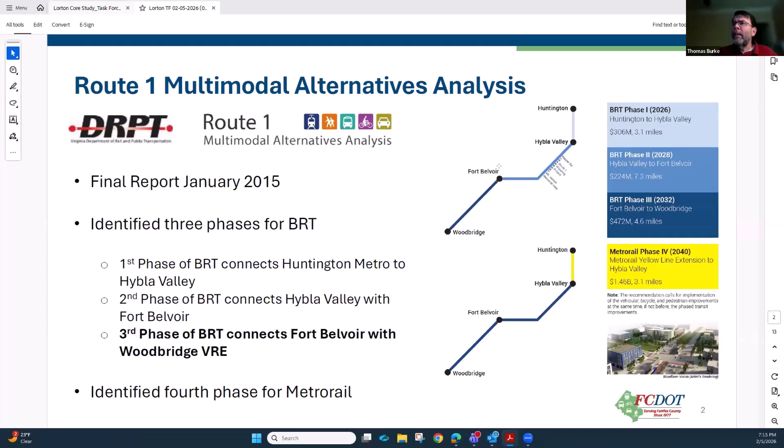Phases 1 and 2 were part of the Embark Richmond Highway Comprehensive Plan Amendment that was adopted in 2018. And then our capital project section at DOT has been designing and putting the funding in place for the one. Some of you might be aware, but the one will be the BRT that runs in the median of Richmond Highway from Huntington to Fort Belvoir to the Pence Gate.

And it's going to have stops at the Penn Daw CBC, the Beacon Groveton CBC. Hybla Valley Gum Springs is going to have 3 stops because it's kind of a stretched out CBC. South County's got one, or Gerry Hyland Government Center, and Woodlawn has one. And then it'll stop ultimately at the Pence Gate where the hospital is.

Phase 3, we didn't really include in Embark Richmond Highway. We had discussions with South County Federation, and we decided we needed to have a much more detailed Lorton planning effort to get before we put the BRT on the map for phase 3. And that's what Lorton Visioning, or the Lorton Core Study, has become.

Up until now, all discussions have talked about how the BRT would be in the Richmond Highway corridor, mostly an exclusive median running right of way. Prince William County, 11 years ago, was insisting that they're not going to rebuild the bridge over the Occoquan. So you got to get that BRT back in mixed traffic before you get to the Occoquan, because it's going to go across the river in mixed traffic.

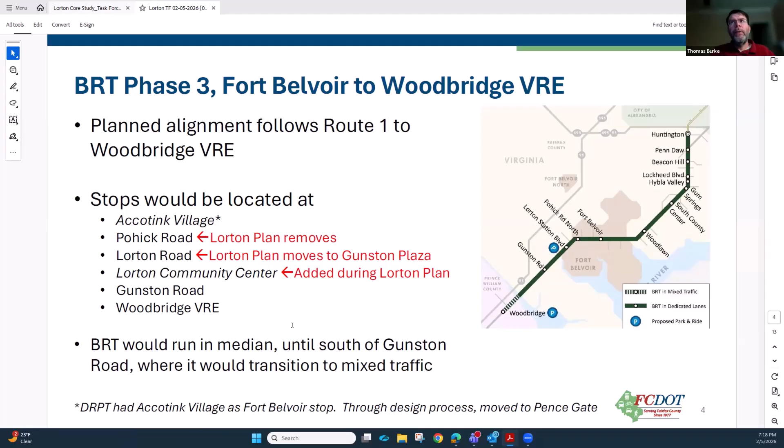So that's kind of what phase 3 of the BRT has been thus far. So a question has been raised: what if we were to connect the BRT to the VRE? How would you do that? And does it make sense? Do we want to do that, or are there other options?

You would still have most of the connectivity to even to Gunston Plaza. You would probably have to kind of reconfigure your BRT stop at Gunston Plaza, but you'd be connecting to more population and jobs this way because you're connecting to the VRE station, and that's what we're replanning. We're replanning Gunston Plaza, so we're hitting at least two of the sub areas.

So the only con that we're really thinking of is if you're taking the BRT from Prince William, this is probably going to add a few minutes to the travel time because the buses will have to veer off of Richmond Highway, make their way around. But if you're in Lorton and you're going north or south, you're probably not going to be affected that much.

It's probably more beneficial to the Lorton folks. The one thing that we thought we could do is there's 3 bus routes in Lorton right now, the 171, 305, and 371. What if we kind of reconfigured those at some point in the future to feed the BRT? That would be an alternative.

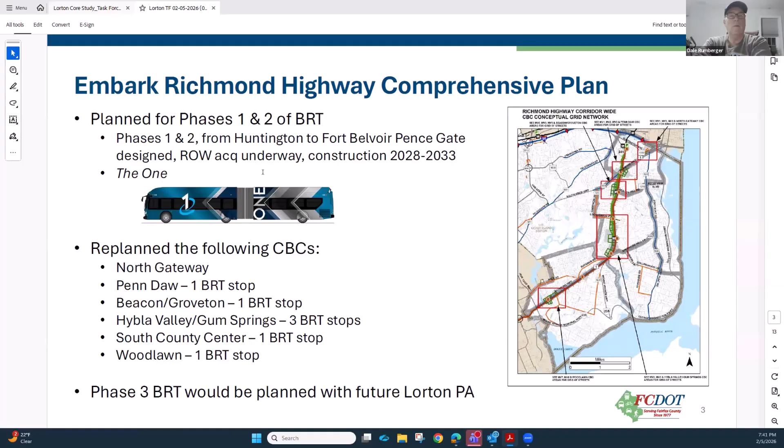To think that we're going to put large scale buses up Pohick Road, turning left and coming around Lorton Station Boulevard and back down, or vice versa, is interesting at best, because Pohick Road would need to be completely rebuilt to do that. That is an excellent point. This is an articulated bus, a lot longer than the standard 40-foot bus. Yes sir, it would definitely require some study in terms of whether this type of bus could even make the turns onto and off the road.

And we can't even get sidewalks built. So I'm trying to figure out what in the name of God we would do with a 66-foot bus. I think finally, when BRT was designed 12 to 14 years ago, I believe there was a strong belief that if you build it, people will go there to shop. I have yet to see that. I've seen the only places rebuilt in shopping have been in Prince William County, Potomac Mills area, or all the way up toward Huntington. In between, not so much.

I'm not sure the stops are there for people needing to use that as the single mode of transportation. But the other part, as already been mentioned, is relief of the commuting traffic out of Prince William County. That's really what this is - relief of the commuting traffic, trying to reduce the number of cars on Route 1, on 95, coming north. To a degree that makes sense, and that may be the pattern of the future, especially as we log jam as it is right now.

We'll get a better appraisal of that when they start putting in the pylons for the third track for VRE, going over near the Lorton Auto Train, and that pass-through traffic gets even further bottlenecked. I think that'll be an interesting indicator. But some of this, I don't know. I was more focused on what eventually we would be doing to bring people in the Lorton area back down to the 3 core areas we've designated. I believe that's going to come in the second part of the presentation in a couple of weeks when we look at that more carefully. So thank you for your time.

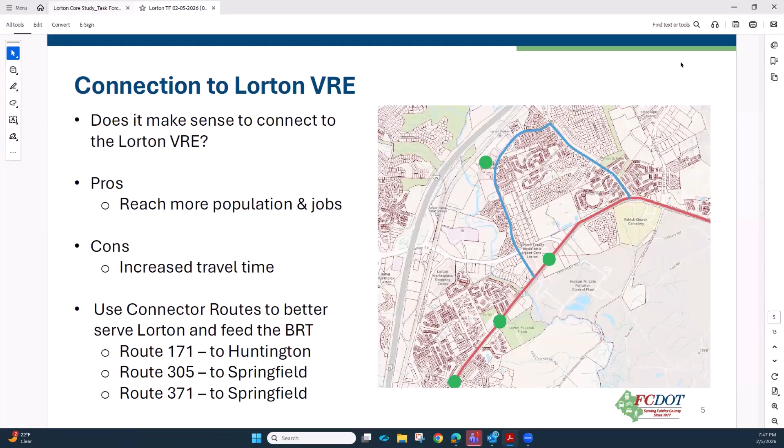I know we have other things to talk about. I wanted to jump ahead to this slide because there was another discussion. What if we wanted to connect to not only the VRE, but to Lorton Marketplace? Would we want to extend that bulb out to the BRT even more, or would we want to keep it simple, Pohick to Armistead, this little loop?

I definitely think there's value here because, as was just said, there's pretty good density of residential and commercial at the VRE station. Is there also value to serving Lorton Marketplace? And then how do we get service to the community center? So do we do northbound stays on Richmond Highway, southbound goes into Lorton, or do we do alternating routes where one goes up and down Richmond Highway, then the next one goes the other way? There's ways we could potentially serve everyone.

But what do people think? You can continue to discuss just the general one to the VRE, but I wanted to put this one on the table as well because we've been replanning Lorton Marketplace as well. Should the BRT go that far, or is that a little bit too far out of the way?

Mr. Malone: I truly think it would be helpful for the Lorton Valley portion, especially with the fact that we're trying to build up that area as well in the future. So I think that would be super helpful.

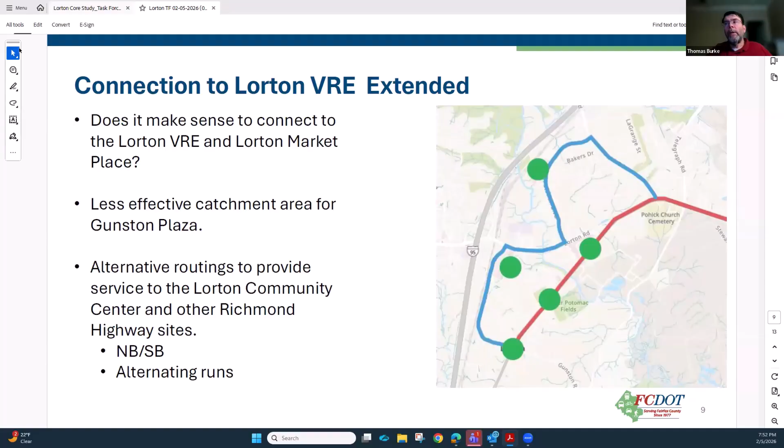This is all good feedback. Graham and Steve, we can give a sneak peek for 3 weeks from now when we come back with a more full transportation discussion. We had discussions in the past about Lorton Road being potentially road dieted to 4 lanes. Our analysis is showing that would probably be a bad idea because of the rising congestion that would come with that. We had some slides about how we might be able to make Lorton into that main street, but I don't know if Steve, Leah, and Graham have other agenda items. Maybe we can save this for the 27th.

Here's what I would say: we'll probably want to move on by the 8 o'clock hour, but since we're not asking for a vote or anything like that at this point, this is more just kind of an introduction. I don't think it's a problem to go over them real quick, and then we can return to these with the full transportation discussion.

This is a general cross section of Lorton Road as it is today, and each intersection is different. This is mid-block where you just have the through lanes, and this is an example of what an approach to an intersection might look like, where you have a left turn lane and a right turn lane. I think our consultant was using—is it Tamarind a cross street? I've got to go back, I should have checked.

As you all live it, you know there are narrow pathways. The 8 foot on the north side isn't bad, but it's really close to the road with hardly any buffer, no street trees. 5 foot bike lanes used to be considered okay. I think 6 foot on-road bicycle lanes are the new standard, but bicycle lanes on a 6 lane road designed for 45-50 mile an hour traffic is crazy.

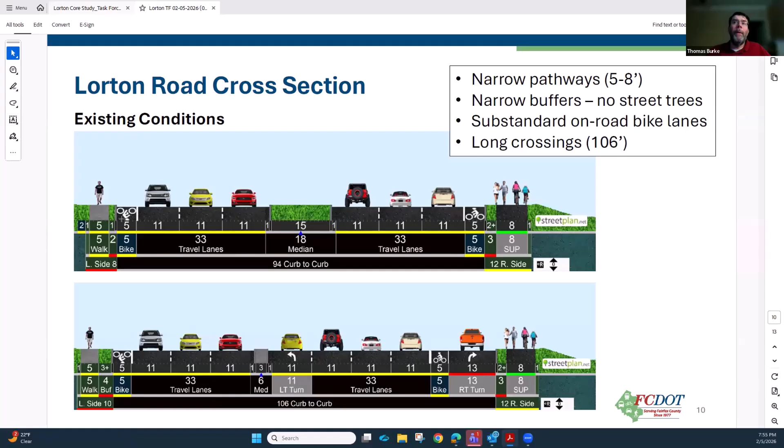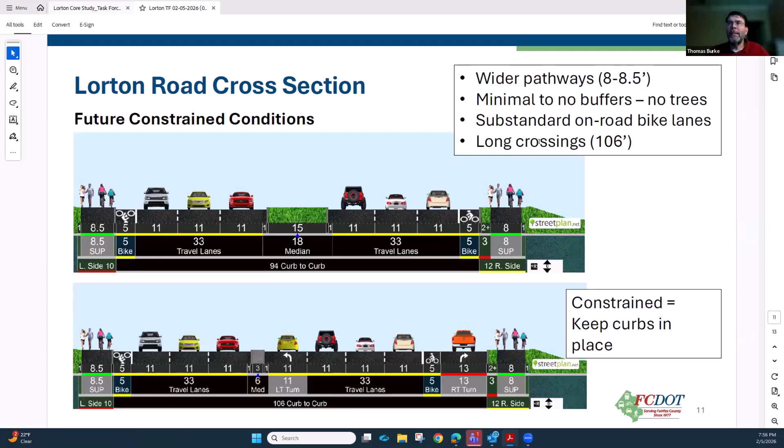That was one of my key questions, so we started looking at how we might reform Lorton Road. If we did it without moving the curbs or impacting adjacent properties much, you could widen the pathway on one side, but then you lose the buffer entirely. Some of the more timid cyclists could move up into the wider pathways, leaving the on-road bike lanes for the more professional cyclists—I'm just using that as a phrase. But you'd still have minimal to no buffers, substandard on-road bike lanes, and long crossings at intersections. So we thought, what if we were a little less constrained?

We don't want to impact the properties along Lorton Road so significantly that they're not developable—that would be a bad idea. But if we moved the curbs outward a bit, taking a few feet from properties on either side, you could have 10-foot shared use paths with 8-foot buffers suitable for street trees and lighting. That would create a much more inviting environment. Our metrics show wider buffers with street trees give pedestrians a better sense of comfort and cyclists less stress. We typically measure comfort for pedestrians and level of traffic stress for cyclists, and these shared use paths would help with that. So we could put these here.

We can answer a few questions as it's approaching 8. But we wanted to put this out there so you could think about it for a few weeks. When we come back on February 26th, we can have a deeper conversation about how we want Lorton Road, and we plan to bring cross sections for Lorton Station Boulevard as well—and maybe Richmond Highway. We've done a lot of work on Richmond Highway in past years and have a generic cross section for it too.

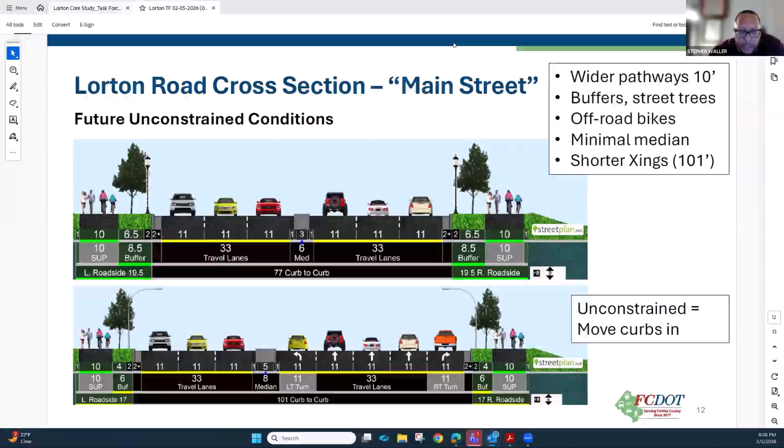I'm going to try to make this as quick as possible. I sent you all the presentation earlier today, and really what we want to talk about.

What we wanted to kind of talk about first is how in the two previous meetings, you had an opportunity to look at the land use from an area-wide standpoint, and reviewing the recommended land use framework. That was the first meeting in November. Then in December, you all had a chance to look at the neighborhood and site-specific recommendations at a very early draft stage.

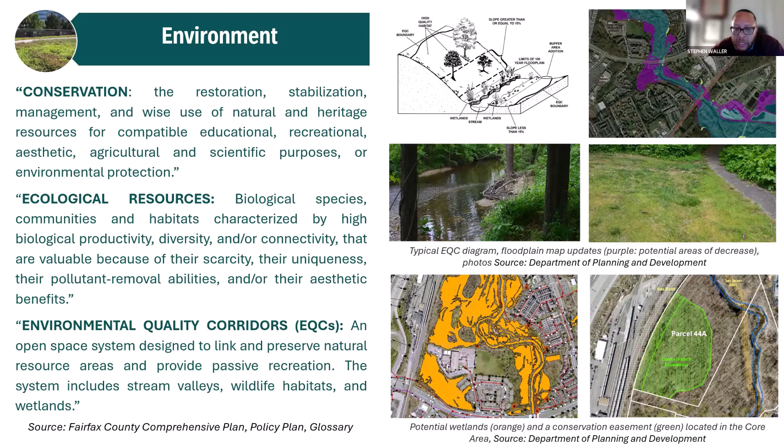Heritage resources can enhance the quality of life by providing a sense of continuity with history, strengthening social ties, and fostering community pride. In addition to prioritizing long-standing goals for preservation, culturally and historically significant landmarks that provide diversity in the area-wide landscape and built environment can also be used to inspire and influence future development in ways that are unique for Lorton.

So that was the end of that. Here's a look at the remaining schedule for task force meetings. As we discussed earlier, on February 26th we will be reconvening to complete the transportation study.

Steve, can you stop for a second? You went through all this stuff, you gave a whole bunch of stuff, you read them. What were you doing? Is that you're just telling us what it says in here, or are you asking us that we agree with everything, or that we're going to do what we've done in the past?

This was just the setup for the conversation, things to consider in the conversation. We're going to do what we've done in the past, where Graham is going to share the text that you all have had a chance to review, and we're going to take your comments on that. But I just want to make sure - I didn't know when you went through all that, if that was just background or not.

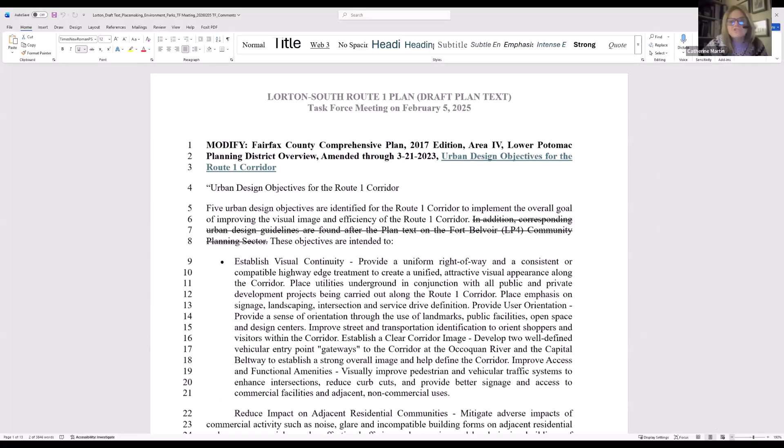Got it? Graham, you almost got it, hold on one second. Okay, are y'all seeing my screen here? It's coming, we can see it. Is that good for everyone, or should we single page it? How's that, is that better? I think you could probably zoom out a little bit more. If anybody wants to zoom in, there's 3 dots above, it says Graham Owen's screen. If you click up there, you can actually increase the font size if you want on your own personal computer.

Good to know. So I'll let Steve go through the text with you, but just for those that weren't able to join the past 2 calls, we used the same approach in the past two meetings where we were going over the land use framework and a lot of the guiding principles. And we'll go through the draft, we're calling this a process that we call the straw man. So what we do is we'll go through the text, and then if you have specific points or questions or suggested edits on any given area, we'll flag those here.

We can't usually make changes on the fly, it's just kind of hard, but we'll make comments and say we need to strengthen this language, we need to move this over here, this is unclear, whatever the case may be. We'll just note that in the sidebar, and that way when we're putting together the final draft for your review at the last meeting, we'll have everything together all in one kit and caboodle with the other sections that you've already previously reviewed.

So what you're seeing here is really just those sections related to the topics that Steve was talking about. So a lot of the pieces related to the core area and related to some of those other guiding principles around land use for the town centers and for the established residential neighborhoods, for example, as well as the innovation center and some of the areas further south in the industrial area. We've gone over that, so we didn't want to rehash any of that material here today. This is really just about those interstitial spaces, those spaces between, and really trying to make sure that those are a part of this idea of bringing Lorton together into one unified vision.

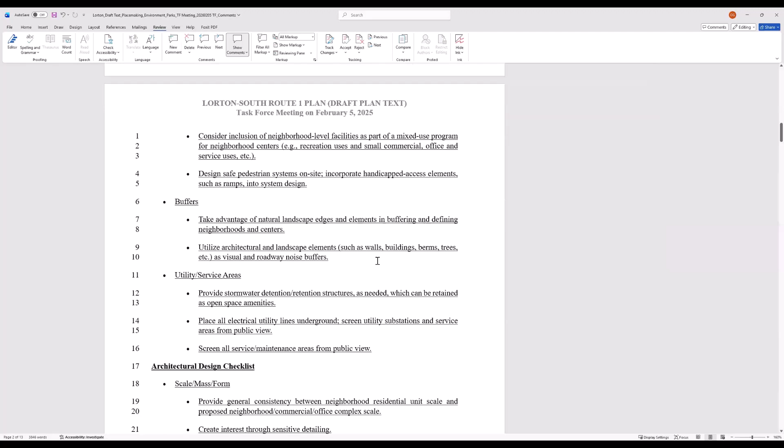Any comments on page 3? Same on 7 and 8, that would be native species.

I know one topic that's come up here before. Lorton has a specific type of architecture in a lot of places that mimics the Workhouse Art Center. Has that been inserted in here in some language?

It hasn't been. One thing that we did include, there's a change - the only change that we included in here, because this is the adopted text that we've just moved up to make it so that people don't lose it, frankly. We added this language in here about the Lorton Suburban Center, which is really kind of referring to our area.

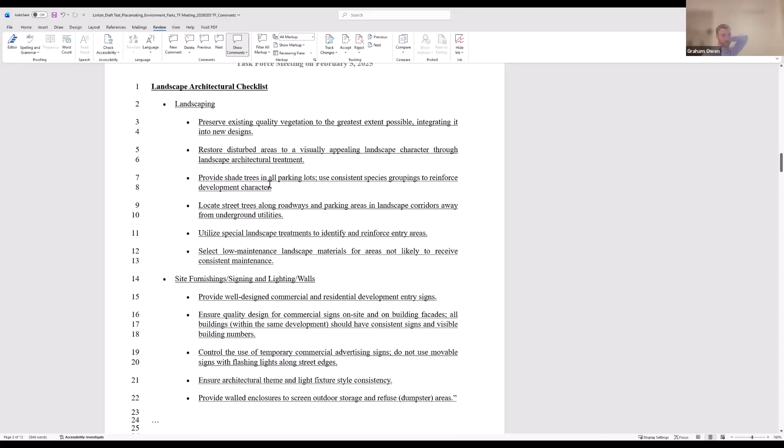Dale, to your earlier point, do we want to try to define that architectural theme thing to try to steer it to the workhouse or similar? I just have a fear of a big developer coming in with ideas very different, trying to start a new theme. Just another two words, something consistent with the history of Lorton - I'm not married to that, I'm just trying to avoid a new theme.

No, it's a good point. Yeah, I'm updating that comment here, Linwood. So Laurel Hill - we call the planning sector Laurel Hill, even if that's not necessarily the name we're after here in this particular instance, but yeah, we can do that.

We'll reference the workhouse in particular and that history and the architectural history there. Yeah, the language in the presentation that I tried to run through pretty quickly - the language from the comp plan does talk about providing a sense of continuity with history.

Well, and that's where we get into loggerheads, because I was going to say Liberty, and then you look over at Liberty, and clearly there's an architectural style that was maintained and enhanced there. Then you look adjacent to that, the developer Elm Street came in and put in townhouses that are absolutely in conflict with that basic design - the flat roof townhouse didn't blend. It doesn't look like any other townhouses in any other development around. So you just have to be careful.

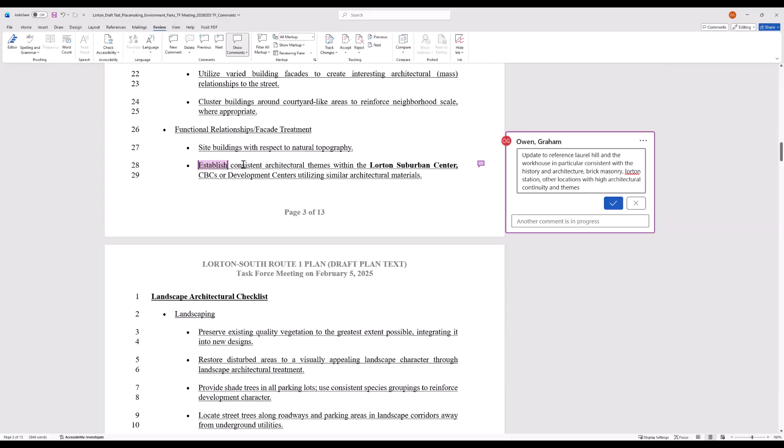Tim, you got your hand up. Yeah, just a suggestion to say consistent architectural themes that are consistent with the history of the area. So you've identified architectural themes first that are consistent with the historic development of the site, of the area even.

Yeah, patterns is good. And we'll keep working on this to incorporate some of the edits over here. But I think that's good.

Any other thoughts on architecture? You may want to reference whatever, I won't call it authority, but whatever leadership role was taken into establishing the historic center of this area. So it's consistent with what was authorized.

Sounds good. All right, Dale, I'll update this section in line with your prior comment. Okay, on native landscaping.

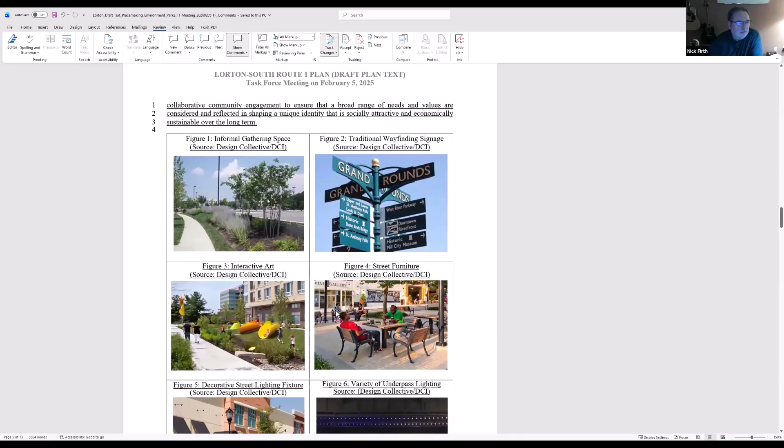Anybody have anything on page 6? This is mostly depictions. Nick, is this supposed to be a representation of the whole area wide or more specific to Lorton? It's the core area. Okay, and it's really just examples of things that could be done. It would be the core area, gateway sites, the kind of innovative employment activity we're thinking fits better along Richmond Highway South. It's just ideas for some of the types of ways that the sense of place and identity can be improved.

Okay, and these aren't the only examples—if you don't like any of these, if there are other things you'd like us to show. I was trying to, you're talking about the core area, and I agree with you in terms of the photos you've provided. If it was larger than this core area, I would probably include something else in addition. But I think for the core area, this works very well.

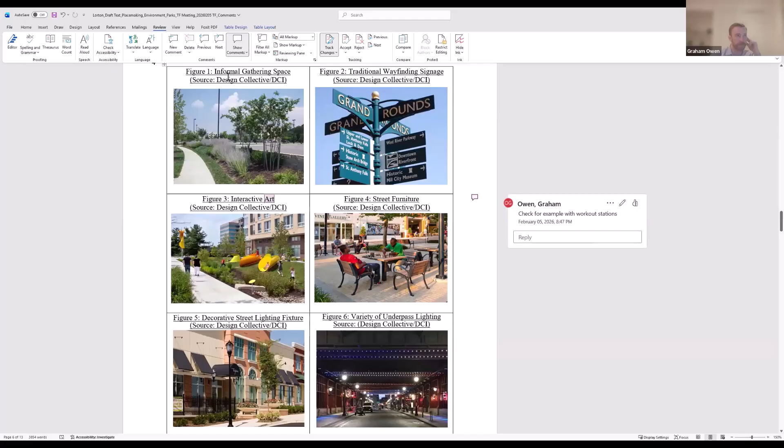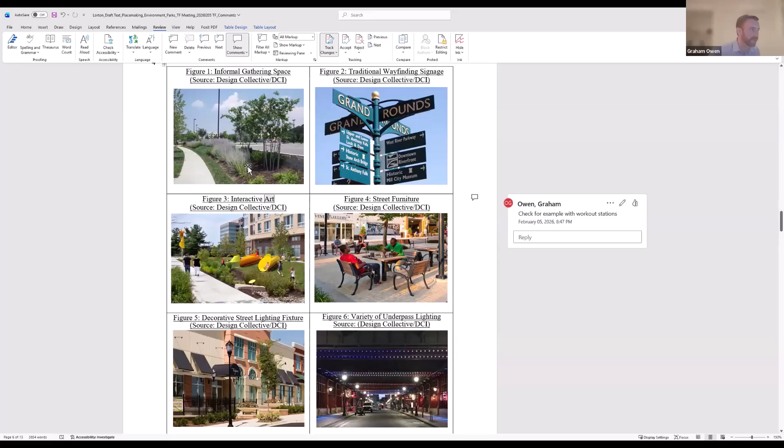One thing I might want to suggest we update is figure 1, Steve. I'm realizing it's labeled informal gathering space, but it's not really—it's more of an example of nice landscaping and a sidewalk, right? I like the picture, it's pretty, but I don't think it describes what it's called. Yeah, that's what I was looking at. Is the gathering space that hardtop behind... I don't think so, I think that's the parking lot. So it's truly informal—fleeting. Hey, how many times have we gathered in the parking lot of the community center after a meeting? Okay, we're good.

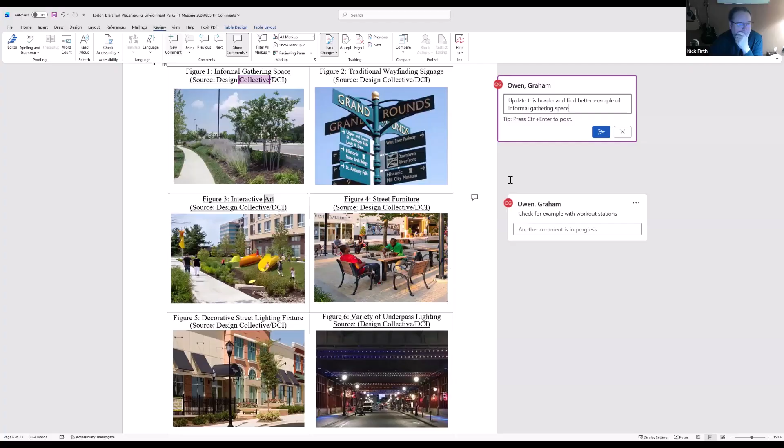Okay, down to page 6. Comments on page 6, anyone?

The only comment I want to make has to do with this. I get that it's general and can mean a lot, but we need to make sure we're not trying to put too many open space type parks or forested areas in the center of town. We do need a center square. I don't know where that's in this document. There needs to be a center plaza of some sort, a gathering place that fits as part and parcel of the park and recreation amenity being put there.

Tim, as I jot this down, I think we can do that. The figure 7 that Steve's going to go over, I assume you'll have some comments on it. What we'll show there is a couple things: there's the existing open space network and park network that exists today, and some additional areas we would recommend adding based on natural features like stream valleys and that sort of thing.

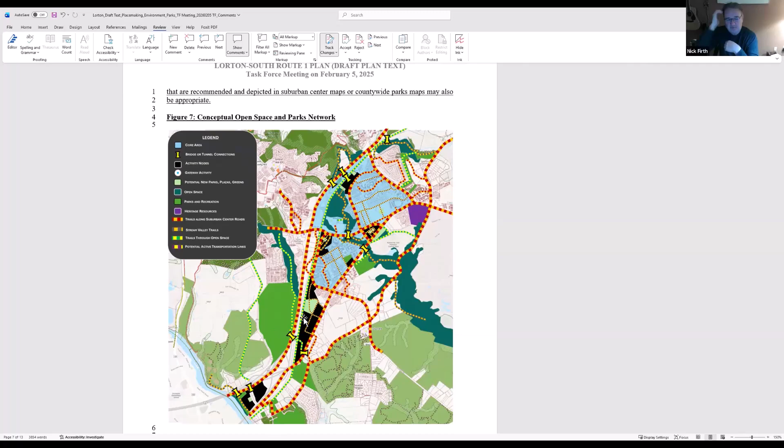I struggled with this at first when I saw it. I don't know if there's a way we can add in some roads or names of places to point them out. I was trying to figure out where Route 1 was on here, and Lorton Road and Armistead and Gunston Plaza. I guess when I found it, it looked awfully small, maybe. Just some better ways to identify spots.

When you first look at it, I had to pull up Google Maps to kind of make my way around a bit. And the trails in yellow and red intersects seem mighty dominant. Maybe that's what we were kind of going for, but...

Yeah, and this is just an early draft, and when our GIS team, when we hand this to them, they'll have a better way of, I guess, increasing the font, putting fonts in that'll provide and identify the roads, as well as a lot of the features that are out there, like the VRE station and things of that nature.

With this, it was just to give the general idea that the recommendation is for the plan to have this network that connects all these proposed park spaces, these potential new parks, to the open space and all the existing parks and recreation features that are already out there.

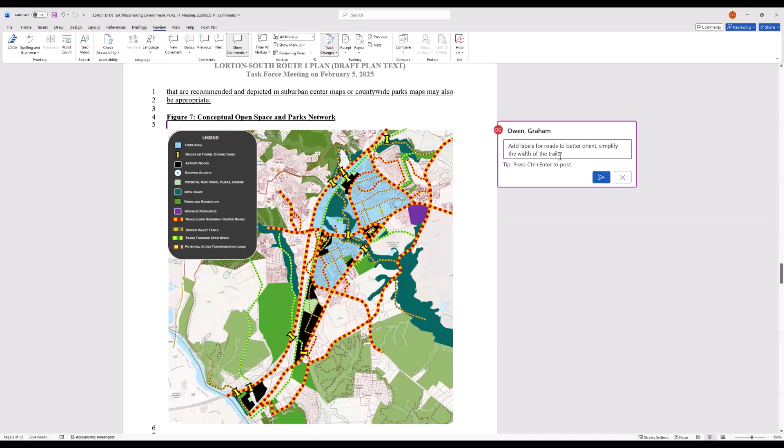So Stephen, it's just that the map is unusable, it's hard to really decipher it, so it's not usable. So this won't be the next map you see. All right, so let's not talk about it much, since it's not going to be used. We're not going to use this map at any point in time. There's no point in discussing it too much.

Well, I think the discussion point is do you all agree that there should be a map that ties all these things together? And that's the big question, and I think we've heard that from you all tonight. Yeah, the map of the core area, I think, is important, it just has to be usable. If we're struggling with it, imagine people who are not as familiar with the area, they're really going to struggle with it. But if the map folks could take those points and work their magic.

Any other comments on the map, I guess, before we move down to the next section? Not seeing any. Down to the top of page 8 or bottom of page 8, the housing, and then page 9. Any comments on here?

I think your first sentence under housing is extremely important and an appropriate lead for that. While we list varying densities, would it be beneficial to add something that is relative to an increase of?

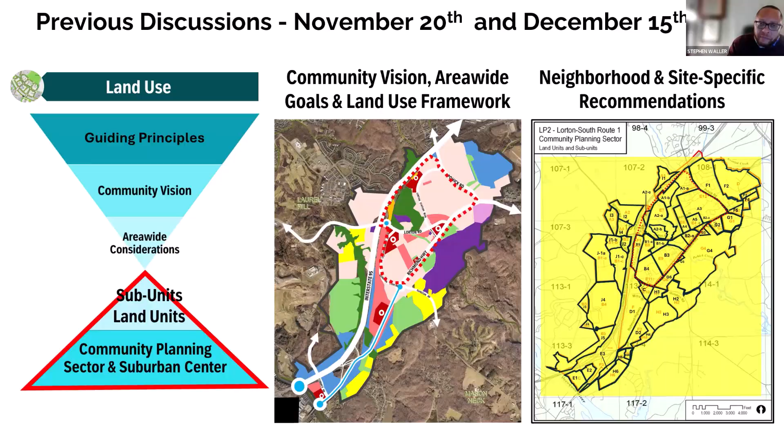But there were some things that were missing that weren't fully defined yet, and those were the parks and open space. What you saw before was what's currently adopted in the comp plan. There was also an environmentally sensitive areas section, and you saw that the way it's currently written in the comp plan. You saw public facilities the way it's currently written in the comp plan, and our partnering agencies from Parks and Public Works, and also our Environment Review branch in the Department of Planning and Development, they were

still working with us to draft this text. So the text that you're seeing tonight is the text that we worked with them on, and that's what you reviewed. So this will really take, after we have this discussion, we'll be taking what you reviewed and discussed tonight and putting that in place of what you saw in the old adopted plan framework. So kind of like Graham was saying, the first part is area-wide considerations about these topics. And then the next thing gets into what is uniquely Lorton about heritage resources, about the parks and open space, and things of that nature.

So a couple of the ones we'll be going over are the light green and the dark green. Steve, I pulled up the one that's got the legend on it so they could see that. This one right here is Parks and Rec, and then public facilities, which does include a couple of the parks, and then environmentally sensitive areas.

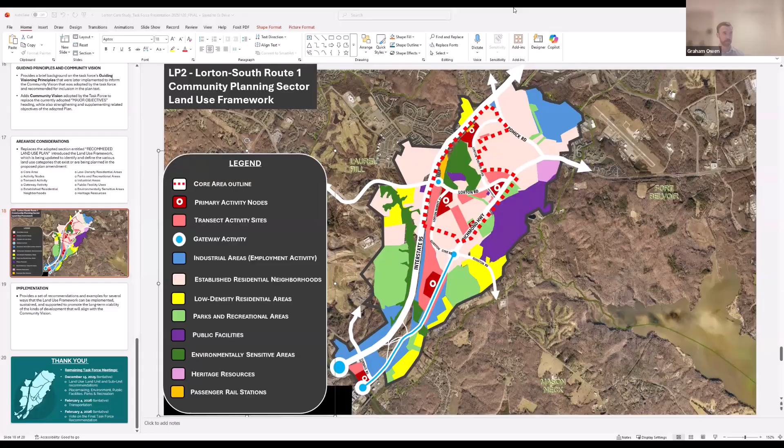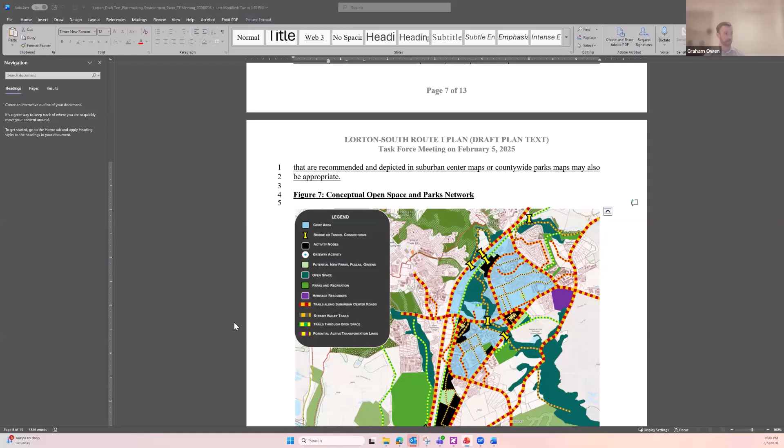I think we were down below this now on page 9. Anyone else have anything on page 9? I think is this my screen sharing or yours, Graham?